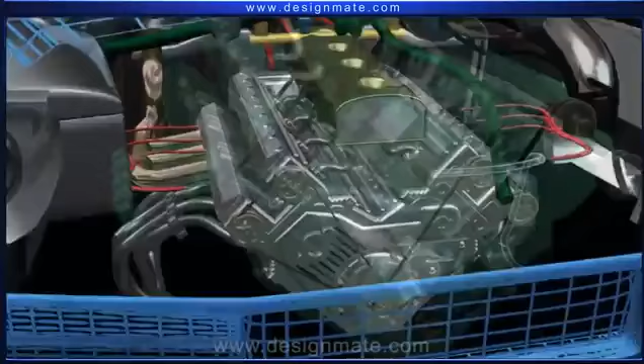Internal combustion engine. In this topic, we will understand how a four-stroke internal combustion engine works. Most automobiles work on four-stroke internal combustion engines. Here, fuel combustion occurs inside the engine, thereby giving its name internal combustion engine. It was designed by Nikolaus Otto in 1876, and hence is also called an Otto engine.

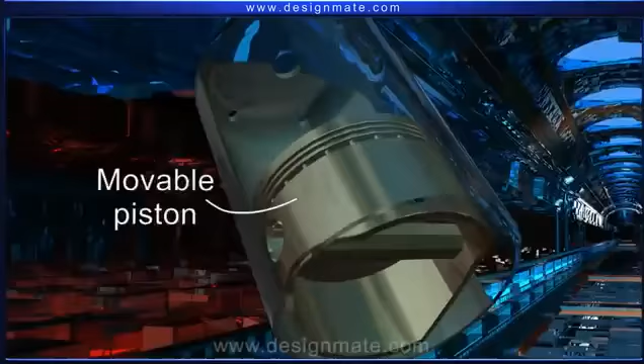Construction. A four-stroke engine mainly consists of insulated airtight cylinders with movable pistons, which are joined to the crankshaft through connecting rods.

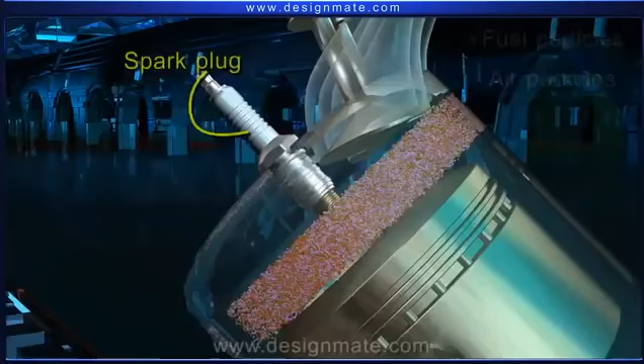The intake valves let the fuel-air mixture enter the cylinder. The spark plug produces spark and ignites the fuel-air mixture, and the exhaust valves allow exhaust gases to exit the cylinder. Camshafts control the opening and closing of valves at appropriate times.

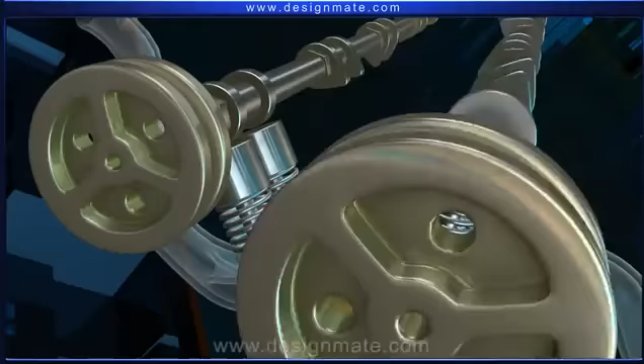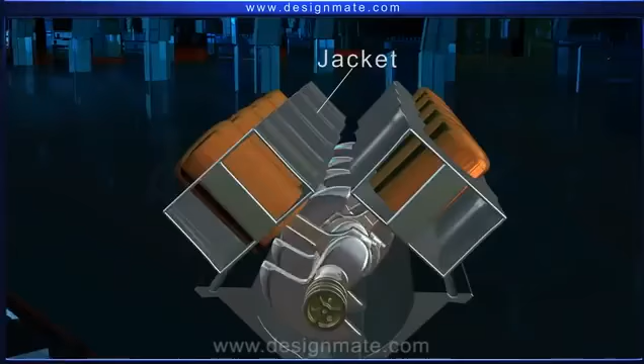Camshafts are connected by a timing chain with the crankshaft to maintain synchronization between their motions. And a jacket surrounds the cylinder bank through which cold water is continuously circulated to absorb excess heat produced during combustion.

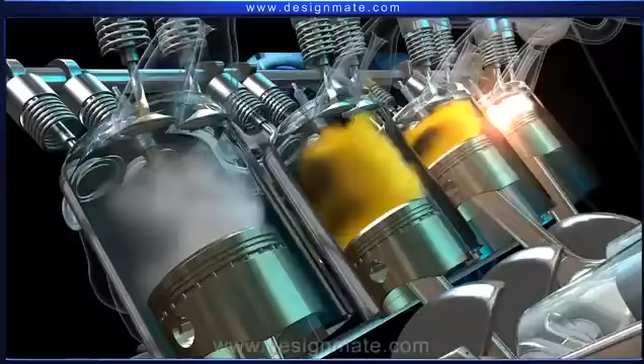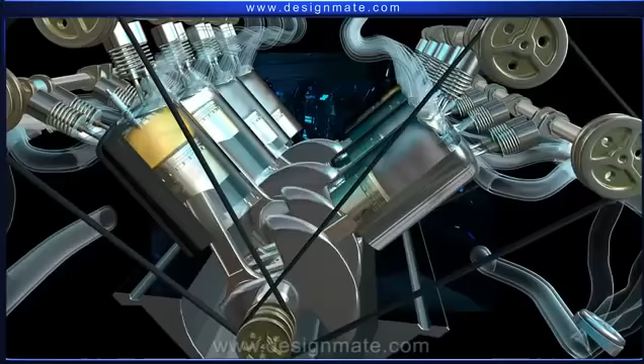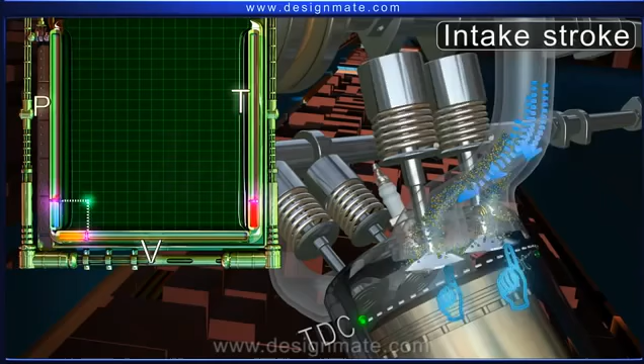The engine cycle begins when the piston is at its top position, called top dead center or TDC, and both the valves are closed. Intake stroke: during this stroke, the intake valves open and the fuel-air mixture, called charge, enters the cylinder at near atmospheric pressure.

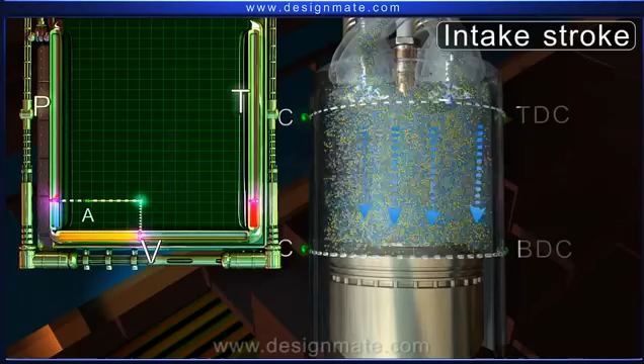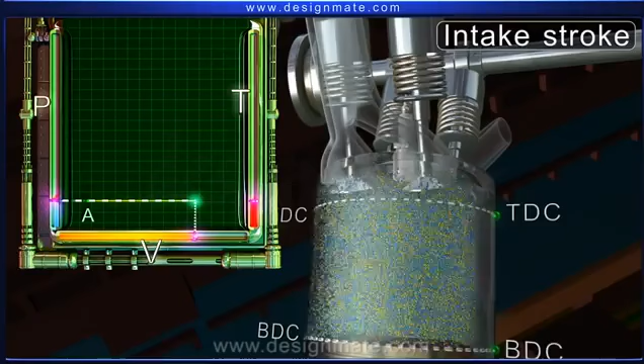The piston descends from TDC towards the bottom dead center, or BDC, of the cylinder, and the volume of charge increases. As the intake valves are open, the pressure and temperature of charge inside the chamber remain constant. When the piston reaches BDC, intake valves close. The cylinder is full of fuel-air mixture at atmospheric pressure.

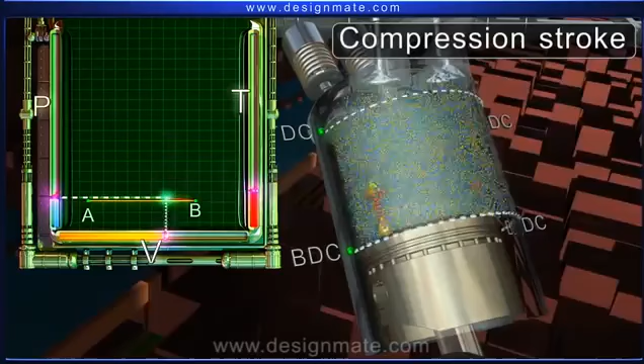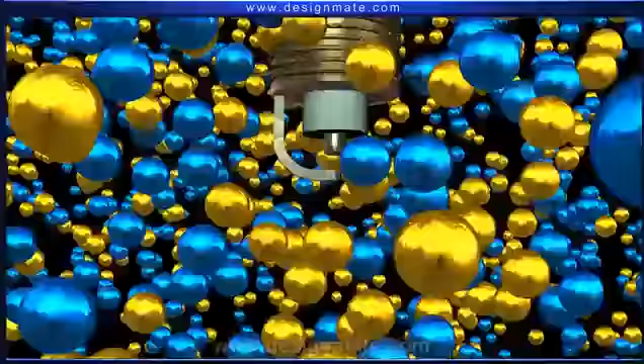Compression stroke. The piston moves upwards in the cylinder with both the valves closed, so the fuel-air mixture is compressed and its volume reduces. The compression causes an increase in pressure and temperature of the gases in the cylinder. Just before the piston reaches the TDC, the spark plug produces spark and the fuel explodes.

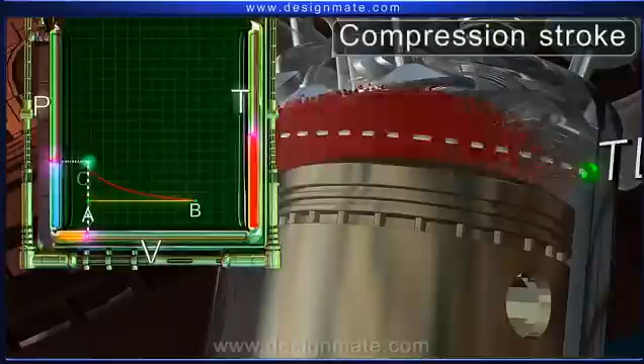Rapid combustion in the closed cylinder increases the temperature immensely. The pressure in the combustion chamber increases to a very high value with almost no change in volume.

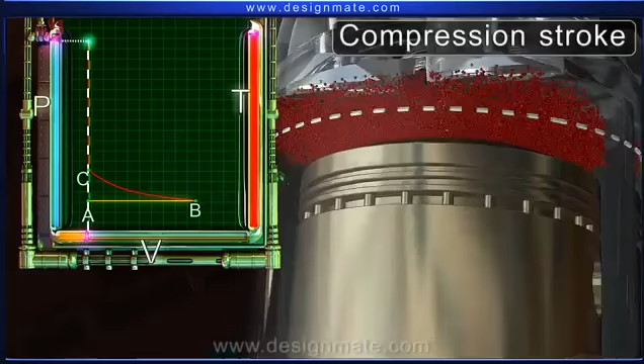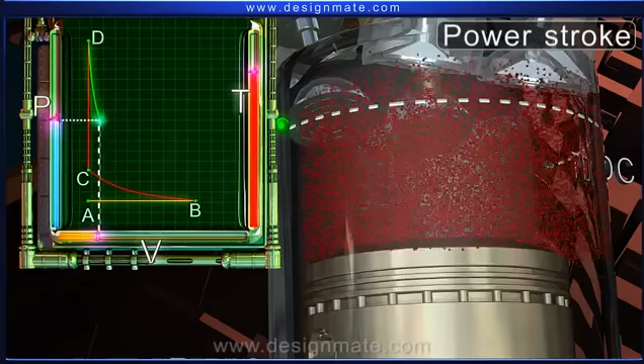Power stroke. During this stroke, since both the valves are closed, the increased pressure acts on the face of the piston, so the piston moves down towards BDC. As a result, volume occupied by the gases increases. As no heat is transferred to the cylinder, the pressure and temperature of the gases decrease.

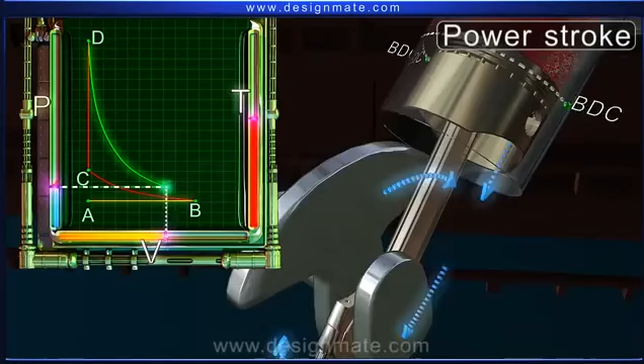The work done on the piston is transmitted by the connecting rod to the crankshaft, where the linear motion of the piston is converted into rotational motion of the crankshaft. This is the only stroke during which power is produced from the fuel to obtain mechanical energy. Hence, it is called the power stroke. When the piston reaches the BDC, the power stroke ends.

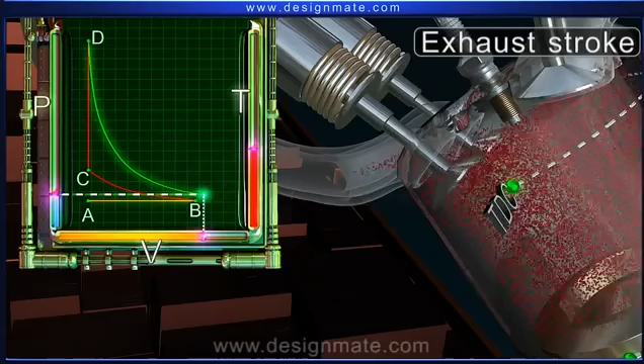Exhaust stroke. During this stroke, the exhaust valves open. Consequently, the pressure suddenly falls to atmospheric pressure with almost no change in volume. The piston now moves towards TDC, forcing the exhaust gases out of the cylinder. The volume occupied by the gases decreases at constant atmospheric pressure.

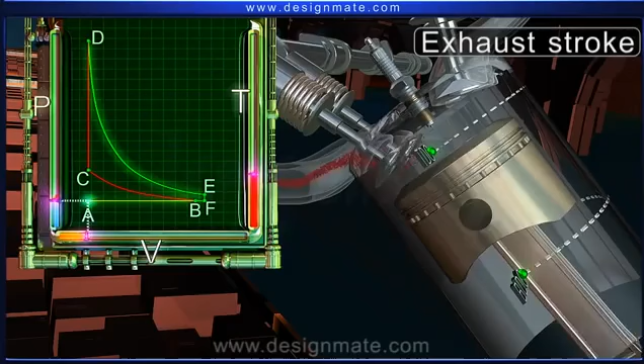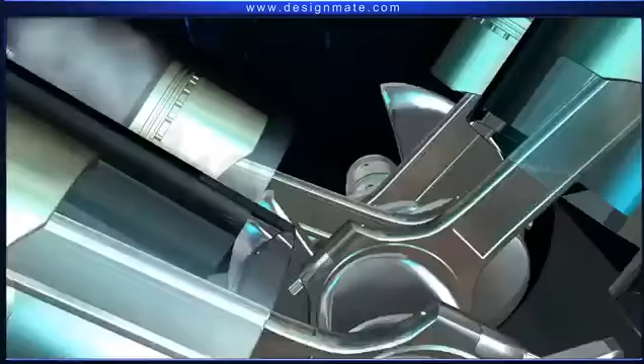When it reaches TDC, the exhaust valves close, completing one engine cycle. These 4 strokes of the engine cycle keep repeating, and the engine continues to work, enabling the vehicle to continue its motion. Summary: the internal combustion engine invented by Nikolaus Otto converts the energy of a fuel-air mixture into mechanical energy by burning it within a combustion chamber.

The engine cycle of an internal combustion engine consists of 4 strokes, namely intake stroke, compression stroke, power stroke, and exhaust stroke. It is called a 4-stroke engine.